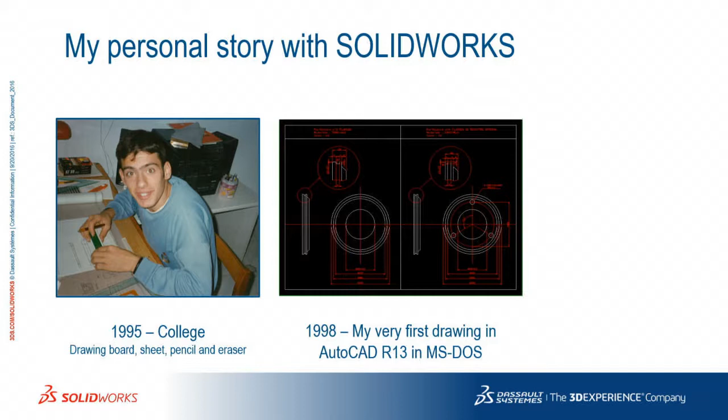2001, with AutoCAD 2000, I started creating some 3D models. You will remember, lots of typing in the command line. But that was another great milestone.

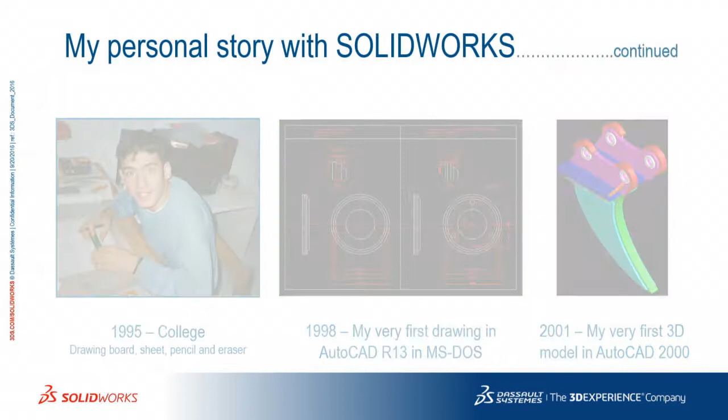Well, he was a sort of a visionary back then, and he must be proud of me today, or at least I hope so. Thank you to Massimo and all the teachers at the conference here today that helped students make important decisions about CAD systems early in their career. I'm sure others are doing the same, and that's probably one of the reasons why SolidWorks is so powerful and so successful today. Since then, SolidWorks has been my only CAD software.

In 2006, 3 days after my graduation day, I buy a ticket to New York, and soon after I go for my very first formal training on advanced assembly and Cosmos Motion. I started to get more serious about SolidWorks in 2008 when I passed the certified SolidWorks Associate examination. In 2009, I became a certified professional user.

A little story about a great company. Standard Motor Products is a leading independent manufacturer, distributor, and marketer of replacement parts for motor vehicles in the automotive aftermarket industry. In 1913, Henry Ford develops and deploys the very first moving assembly line for the automobile industry.

A new era was born, and on the streets of New York City, two gentlemen established Standard Motor Products in 1919, with its location on 10th Street. In 1939, Standard Motor Products moves to its current location, 3718 Northern Boulevard in Long Island City, New York.

In 1977, the company is listed on the New York Stock Exchange under the symbol SMP. And in 1992, we appear on the Fortune 500 list of America's largest corporations as a leader in the motor vehicles and parts category.

SMP's numbers today: over 3 million square feet of manufacturing plants, offices, and distribution centers; $949 million in sales; 3,500 employees worldwide. SMP recognized the value and potential of SolidWorks in 1997 when we purchased the very first licenses.

Today we run over 50 seats of SolidWorks, including standard, professional, premium, inspection, electrical, and we're adding PDM and Composer as well.

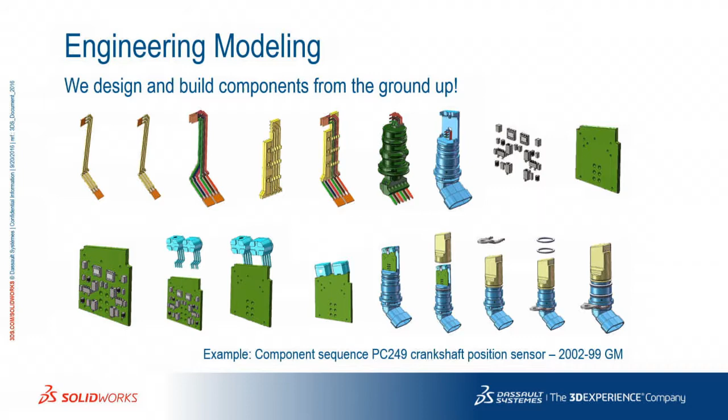At SMP, we design the components from the ground up. Here in the slide, you can see the assembly sequence for a crankshaft position sensor. We also design all the manufacturing tooling and testing stations to be deployed in our production facilities.

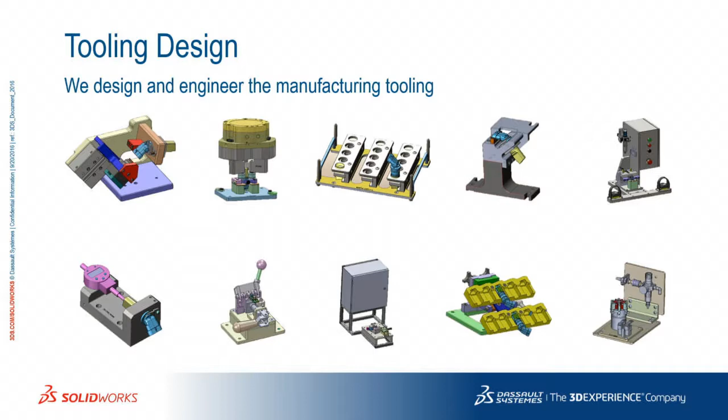This is the core of the presentation, where I'll share some of the projects I worked on with SolidWorks. In the last 10 years, I've had the privilege to work for different companies within different industries. The most important experiences were in food packaging, mining, industrial machinery, material handling, and automotive.

Starting with food packaging: a cheese filler, sealer, and capper all in one. There are great emotions attached to this machine. This is the very first project that I believe made me a machine design engineer. Prior to this project, I'd only been involved with small sub-assemblies, parts, and revisions, never an entire project.

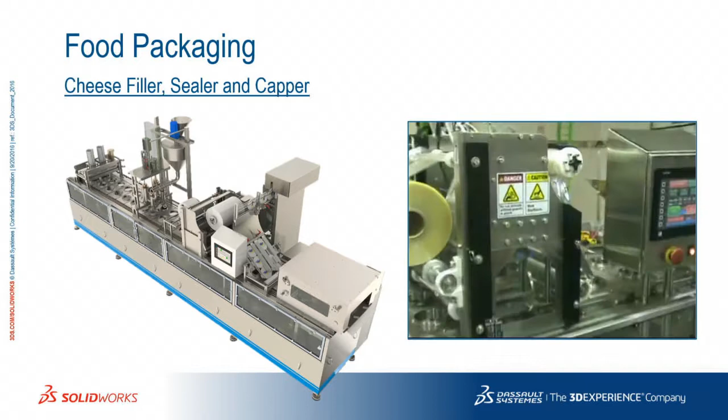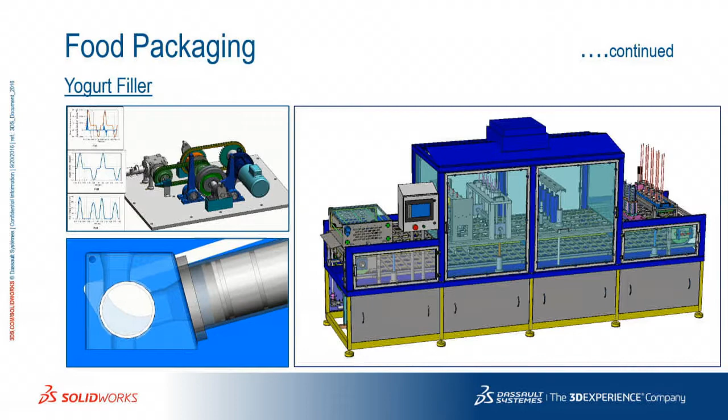The analysis of weldment size and radius is a crucial part of the design here. Fatigue-resulting cracks are the number one cause of failure of these structures.

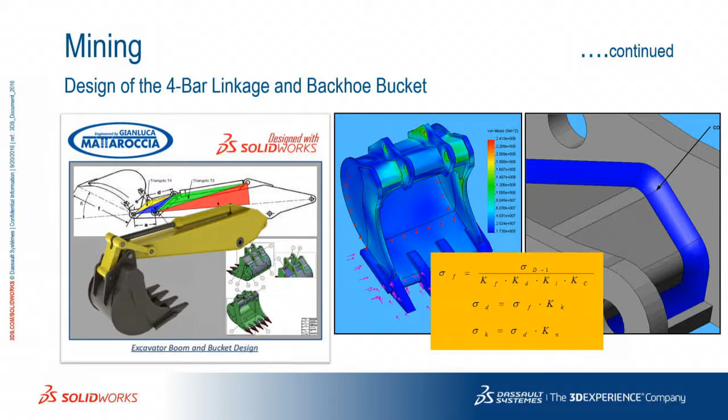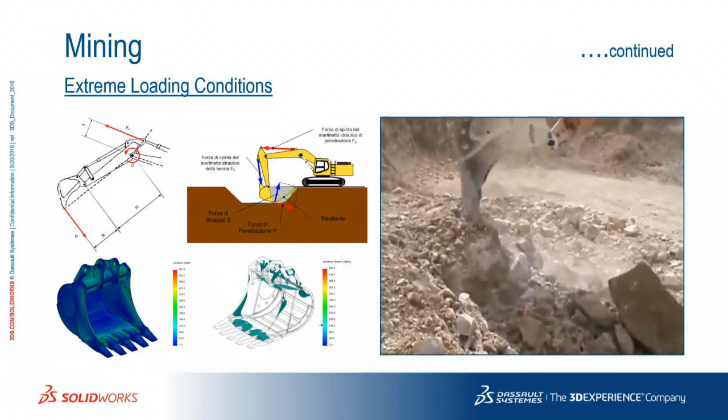Bucket penetration into material is achieved by bucket curling and crowd forces. For the example shown in this video, the magnitude of these two forces are respectively 21 tons and 26 tons. Loading conditions constantly changing in intensity and direction make the design of these structures really, really challenging.

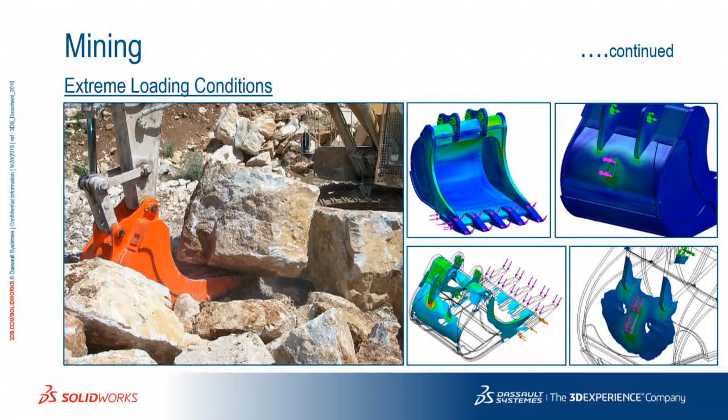This is a marble bucket. It is designed to detach and move large blocks from quarry walls. Each of those blocks can range from 2 to 10 tons. Simulation is definitely exciting and helps predict costly failures.

This is a bucket that was designed for a quarry located in southern Italy for an excavator, Komatsu PC600. The welding of this structure is a 100% manual process and takes about 40 working days to complete. The weight of the bucket is about 11,000 pounds, and at full capacity it can dig 4 cubic yards of material at a time.

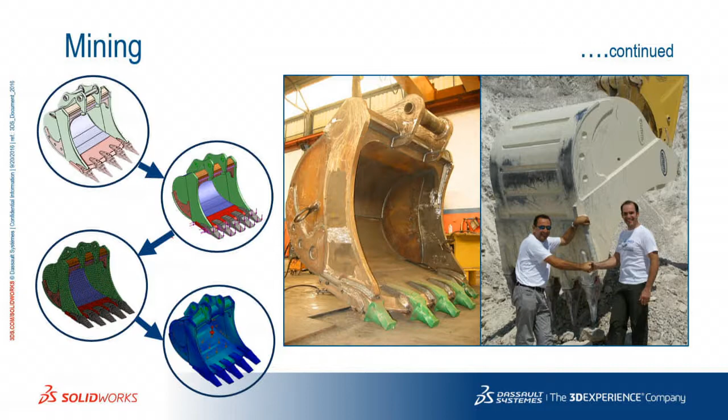Industrial machineries. This is a case depalletizer designed and manufactured for Publix supermarkets in Atlanta, Georgia. The customer delivers milk crates in stacks 3 by 3, 7 high to its supermarkets. Once the empty crates are returned to the filling facility, they have to be washed.

This is the very first station of the process, where a forklift places a pallet with empty cases on the infeed of the machine, where they end up single filed and separated from the pallet. The wooden pallets get stacked one on top of each other by a scissor lifter at the end of the drag chain conveyor.

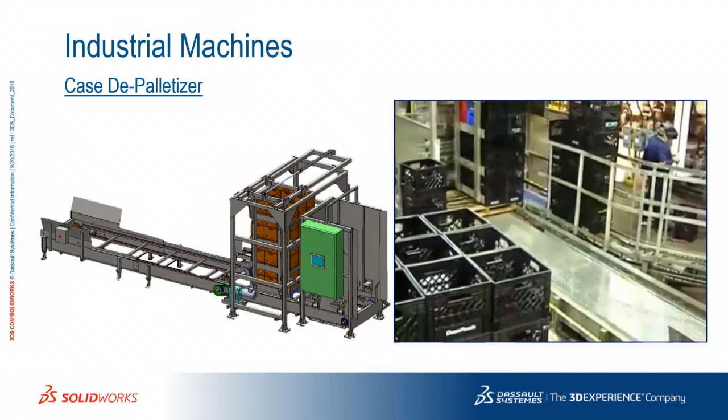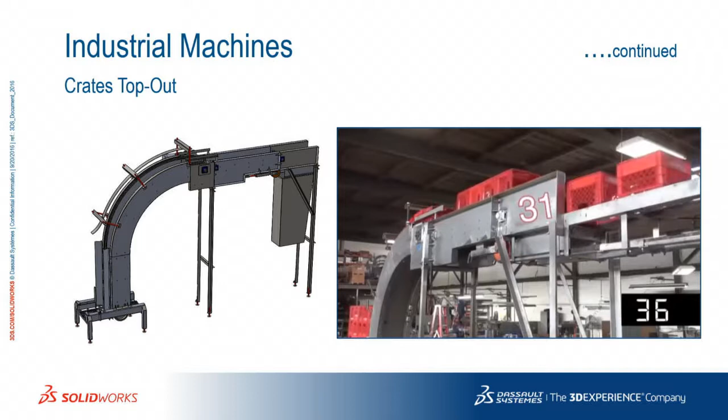That's how they get separated and single filed. Next, the crates travel to the next station, the top out. This machine receives cases stacked at heights of up to 7, then lifts, unstacks, and inverts the cases, delivering them to an overhead case conveyor that passes through a case washer where a high pressure temperature steam jet cleans deeply the cases before receiving fresh bottled milk. This sets a record in the industry with 80 cases processed per minute.

This slide takes us to another great industry, material handling. This is the largest in terms of size project and structure I ever designed. It was designed and fabricated for one of the biggest cranberry processing plants in North America. While I cannot reveal the name of the customer, I can only tell you that it's very close to ours, here in Massachusetts.

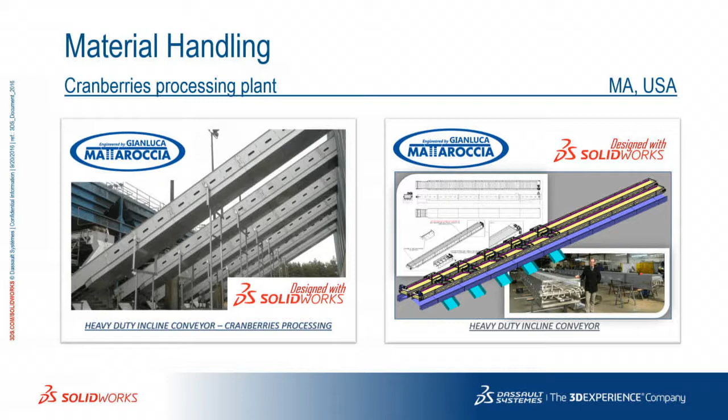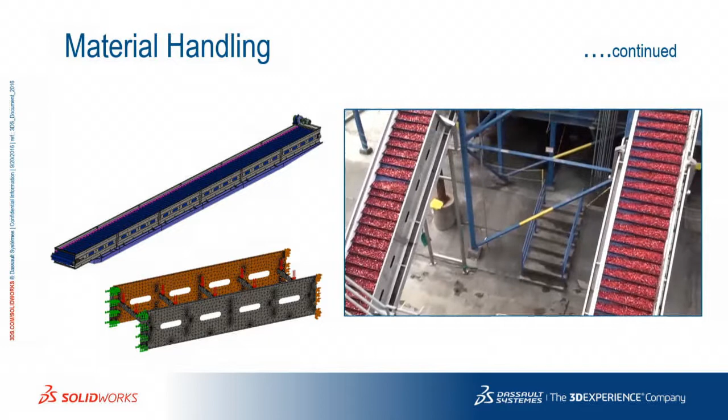It's a full modular structure, lengths ranging from 40 to 150 feet, speed up to 150 feet per minute, carrying 180,000 pounds of products in just 3 months. That's how long the harvesting season is.

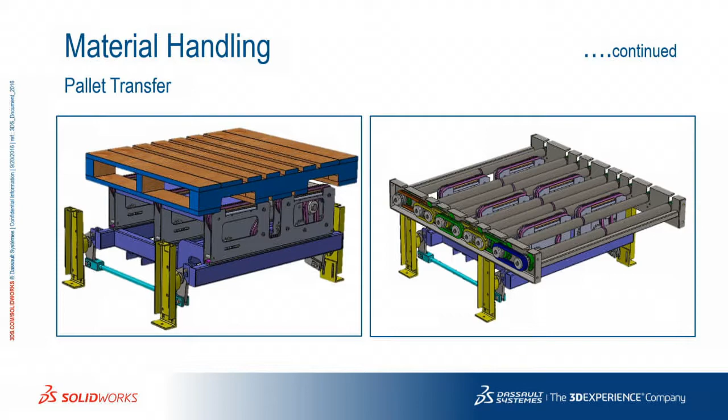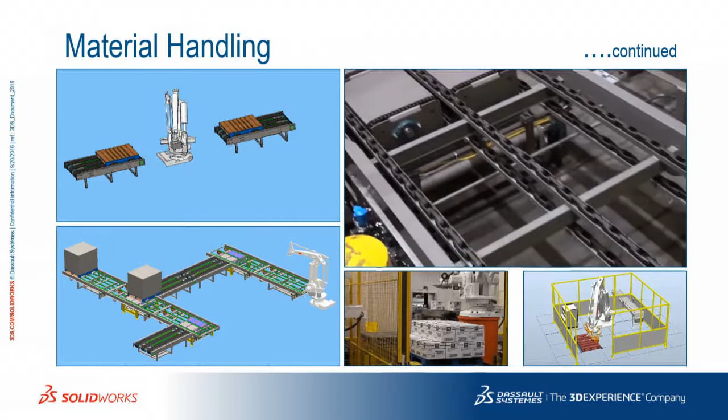Following is just a panoramic overview of the process, along with the first animations put together during the commissioning of the project. Animation helps verify cycle times and avoid bottlenecks of the packaging line.

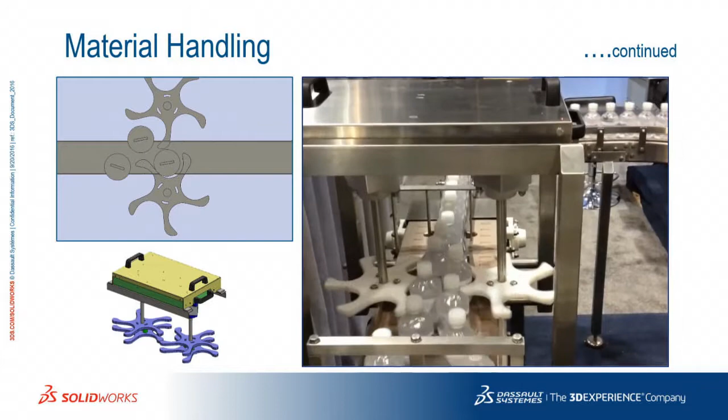This is another great example of an animation-driven design. A system was designed for a major bottling company in New York to help them single-file and dual-file bottles for their production line. The star wheels are not powered by any external source. The back pressure of the water bottles starts the motion of the wheels, and as speed varies, the system is fully autonomous. No adjustments are needed at any point in time.

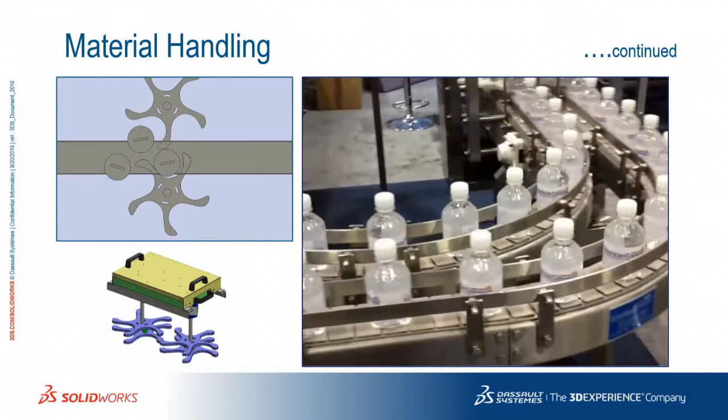Material handling. This is for the ice cream lovers. Following is just a diversified range of conveyors that were designed for Unilever on their Good Humor, Breyers, and Klondike bar production line. Sheet metal is an extremely powerful tool and environment in SolidWorks, and it poses no limits to the things we can achieve.

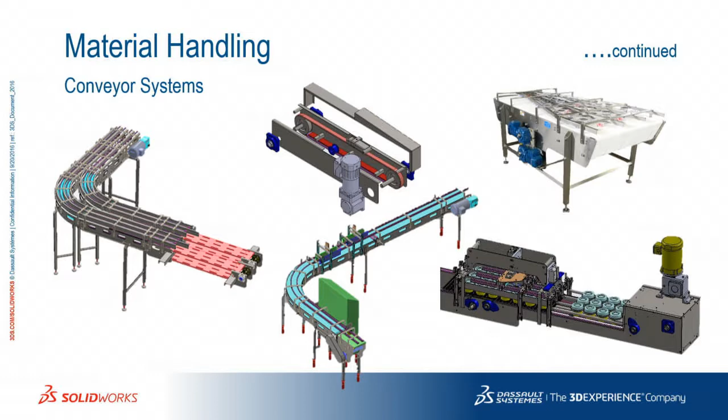Full parametric models driven by design tables allowed us to redesign an entire conveyor system in just a few hours of work.

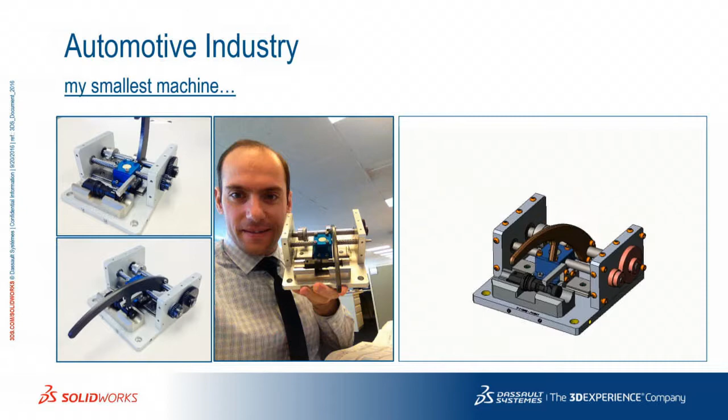Automotive. Following are a series of testing and validation equipment for ETBs, electronic throttle bodies. A throttle body is a butterfly valve located between the air intake and the intake manifold. It regulates how much air flows into the engine based on driver input through the gas pedal. As more air flows into the engine, it injects more fuel, thus allowing for more power.

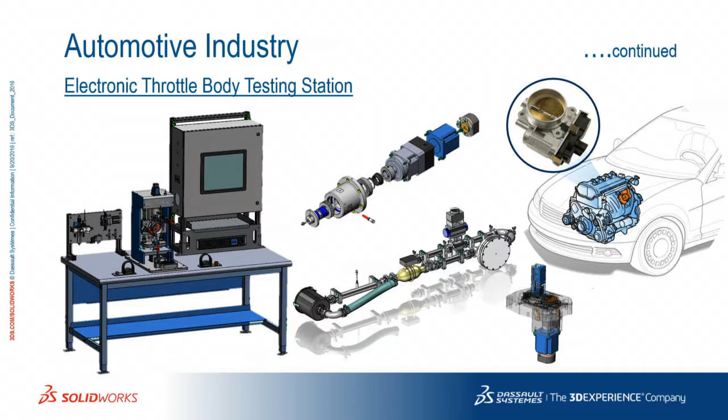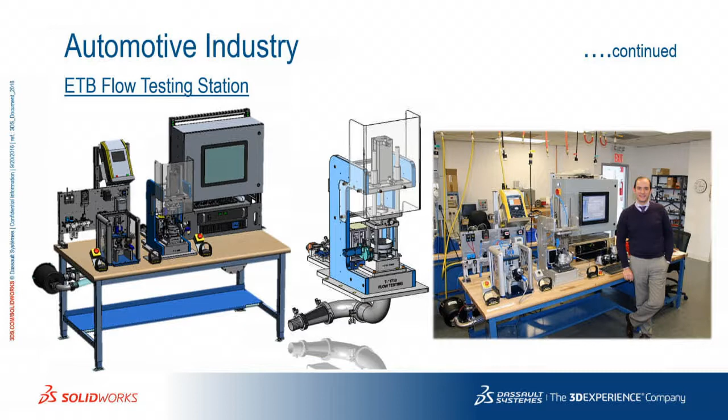Each part is calibrated and validated after. This tester measures the amount of air flowing through the throttle body at different angles of the butterfly plate and the response time, that is the time needed for the butterfly valve to go from full throttle position to engine idle position.

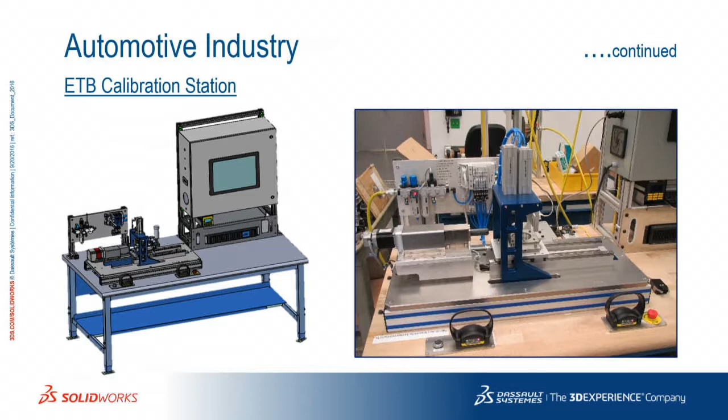Projects of this complexity, of course, involve mechanical, pneumatics, electrical, and control integration. And I guess this brings to the end of my presentation. I hope you enjoyed my testimonial today. I want to thank you, SolidWorks, again, for enabling engineers around the world to build better products and faster. Thank you, Gianpaolo. Thank you, SolidWorks.